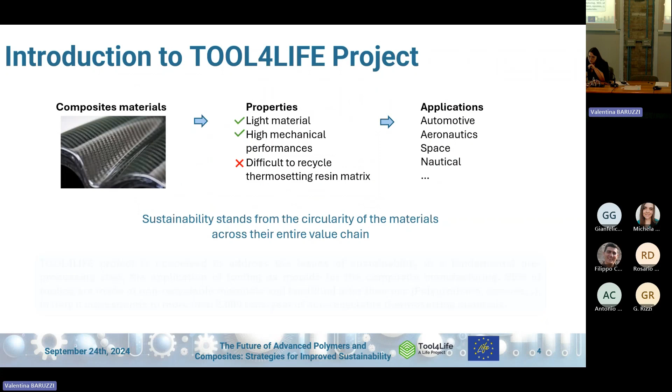But when we talk of these materials, we also have to consider the issues of sustainability. In particular, in our project, we consider the issue related to the thermosetting resins that are used during the production of the composite. Considering this issue, we can estimate that only in Italy, more than 2,000 tons per year of thermosetting material are landfilled. It comes from the production of composites tooling.

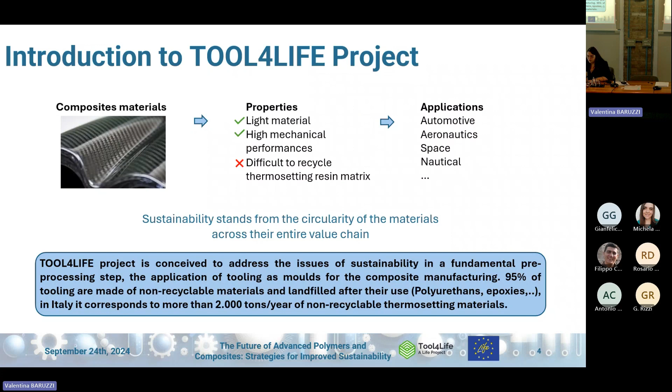The idea of the TOOL4LIFE project is to improve the sustainability of composites, addressing an important pre-processing step of this production, in particular the production of the master model. Usually, when we consider the production of a composite product, at least in this case, we have to consider a process of 3 steps. First, the master model is produced.

Usually in the benchmark situation, this is done using polyurethanes or thermosetting materials. Then this master model is used to produce a mold that is finally used to produce the final composite product. In TOOL4LIFE, we want to modify and optimize the methods, process, design, and materials for the production of this master model.

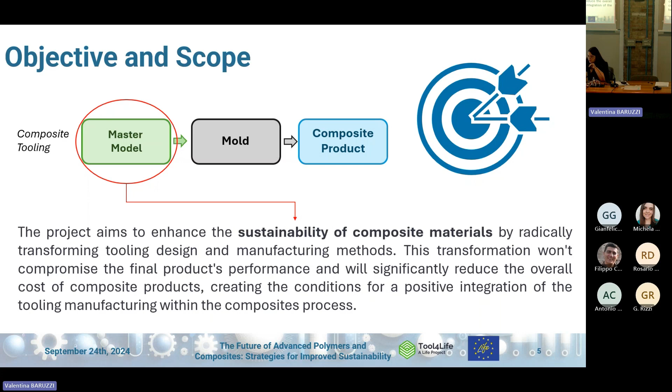The main objective is to develop and demonstrate a hybrid approach for this manufacturing, in particular using additive manufacturing and milling. This process will demonstrate a reduction of the total volume of material used of up to 80%. Furthermore, with the new process, we are able to achieve a cut of the energy consumption by 33% respect to the benchmark, and also a target of 9.2% reduction of the CO2 equivalent emission.

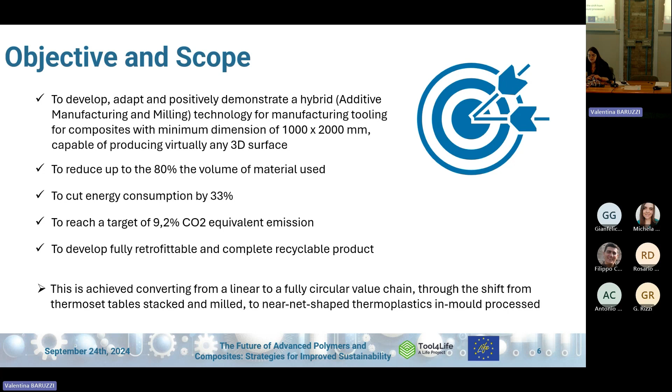Furthermore, we will also demonstrate a fully retrofittable and recyclable product for the master model. This will be done by converting from the typical production process, which considers a polyurethane table that is milled to the final product, to a fully circular value chain that also uses thermoplastic materials that are reusable.

This is our process. The first step in the production of the master model is additive manufacturing. This step already allows us to reduce a lot of the mass of material used in the production of the item, followed by a final milling to reach the final shape needed to then produce the final composite product.

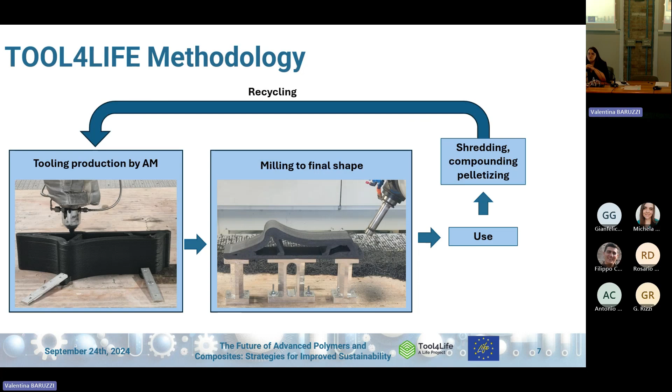After the use of this mold, the innovation of this process is that, using thermoplastic materials, it's possible to shred this product again. If needed, a new compounding is made with virgin material or other additives, and it can be used again to produce new pellets that are used again in the additive manufacturing process.

Our project in its execution is divided into 4 fundamental steps. We are now already at the end of this project, so the first step is completely done, and it's the design, the procurement, and the commissioning of the overall pilot.

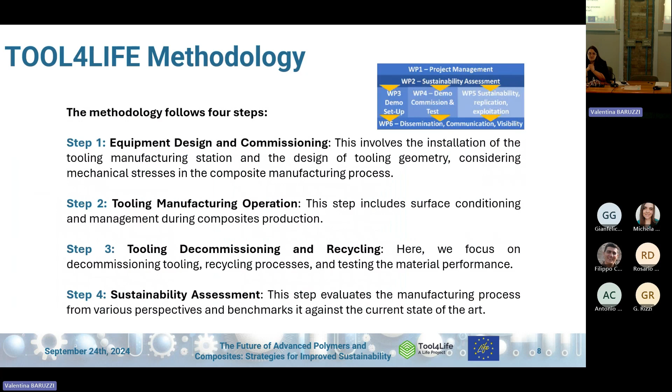Then the 3 subsequent steps are now ongoing: producing the different tooling to demonstrate our technology, the study of the recycling process in additive manufacturing, and also the sustainability assessment that allows us to demonstrate the positive impact of this project.

These slides want to show the role of the different partners. First of all, the first step of this project was to identify the best thermoplastic alternative material to be used in additive manufacturing. This work has been done by Centexbel.

Then the second step was the development of more sustainable water-based sealants, in particular primer and release agent, for the use of the tooling, and this has been done by Marbo.

Then there is also the study of the recycling process and how to optimize it. This is currently ongoing and is done by Centexbel with the support of Bercella for the pilot scale.

Rina has the role of the topological optimization of the master model in order to use as low a volume of mass as possible during additive manufacturing, and also we are performing the environmental, economic, and societal sustainability assessment of this new technology. Bercella takes care of all the demonstration and testing activities of the overall system, from production to recycling of the process.

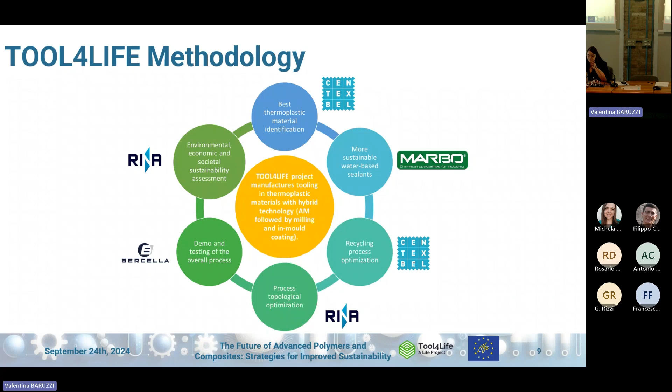You can see that the pilot is now working and operative, and we are now starting the validation phase. So finally, we will demonstrate that all the results of the project are effectively working well.

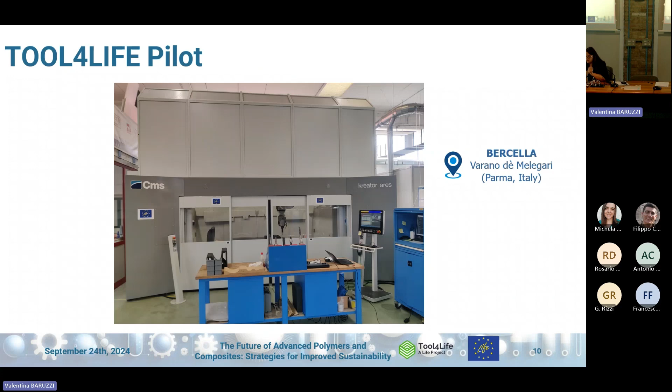This pilot is, of course, located in Bercella's facility. So here I wanted to give you an overall view of the impacts that we can have with this new technology.

First of all, a huge waste reduction. In fact, the new process, compared to the state-of-the-art process, can reduce up to 20% the volume of material that is landfilled at the end of the process. Furthermore, the use of additive manufacturing can reduce a lot the energy consumption that in the previous process was mainly related to the machining of the tooling.

Then with this process we can completely avoid the use of toxic chemicals such as isocyanates used in polyurethane production, and we also reduce a lot the CO2 equivalent emissions. If we consider a medium-sized tooling with the state-of-the-art production process, it releases around 685 kilograms of CO2 equivalent. With our new process, we arrive at 63 kilograms of CO2 equivalent per unit. So it's a huge difference.

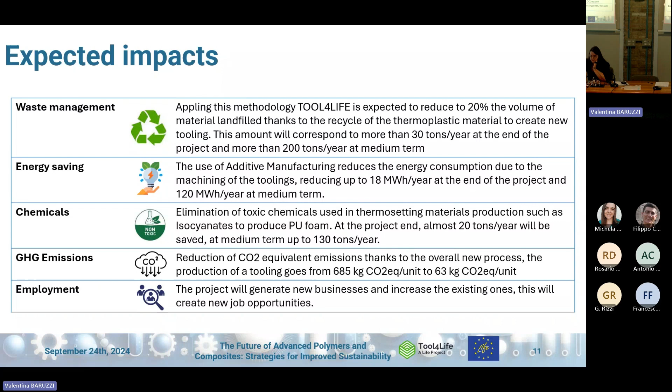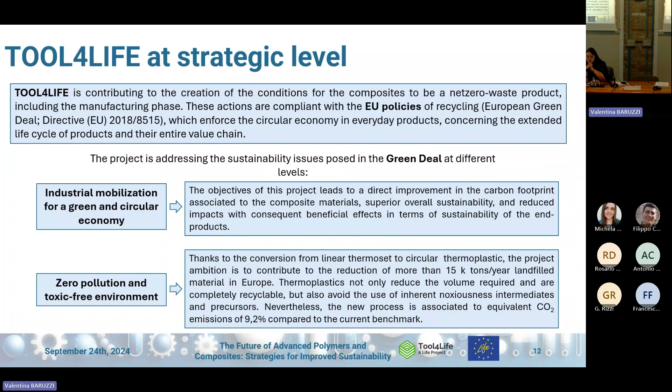If we want to see our project in a broader view, we can say that all these results are completely in line with the overall European policy and roads that all these projects are following. In particular, we are completely in line with the Green Deal and the objectives of circular economy and a zero pollution, toxic-free environment.

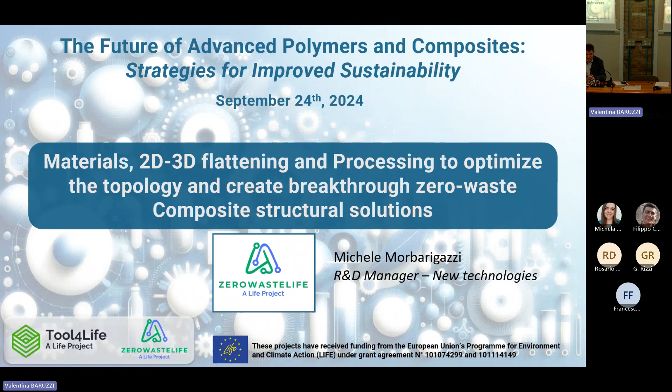I will proceed with the presentation of Zero Waste Life, a project that wants to investigate the possibility to improve sustainability from the other side of the circular economy. So avoiding the waste of materials, of raw materials - we start from the beginning and not from the end of the use of composites.

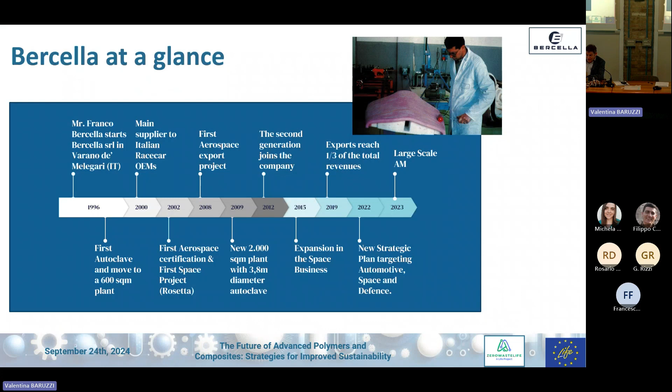A few words on Bercella: we started with Franco about 30 years ago. You can see some of our important steps - we are a quite important producer of motorsport carbon fiber parts. The new era of our activity is starting with an important role in aerospace. The last important innovation is the adoption of large-scale additive manufacturing, that Michela told you about before.

In a few words, we are a medium company of about 100 employees. Here you can see some numbers, and we have an important development plan because next year we will have a new plant mainly dedicated to aerospace and space production.

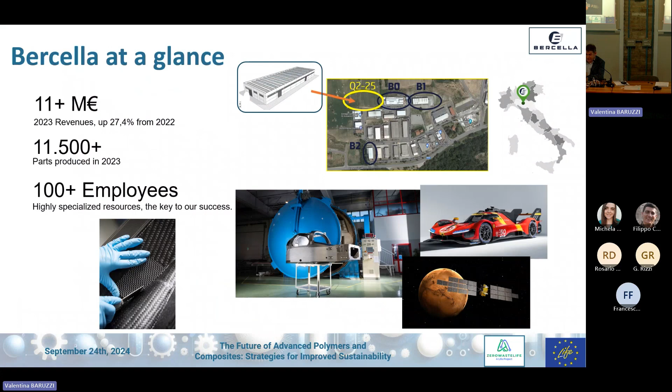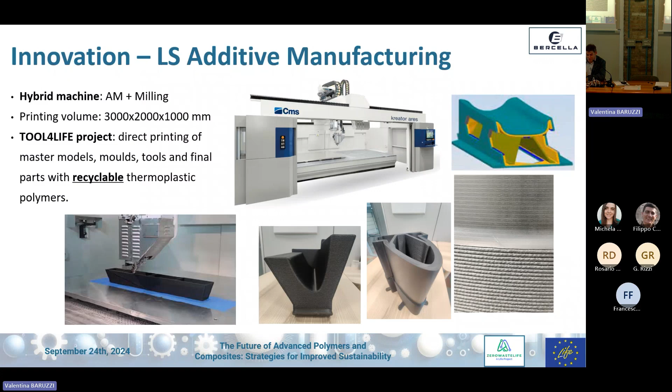You know almost all about large-scale additive manufacturing. We have an important machine with a printing volume of about 3 by 2 by 1 meters, and Michela described its function very well. We also have an example over there of printed polymer in raw and milled form, and we can discuss the technology afterward.

The Zero Waste Life project has three beneficiaries, three partners. Bercella is the coordinator, but also Nobrac in France, located in Montauban near Toulouse, in the very center of aerospace production in France. And an important role is played by RINA, located mainly in Genova.

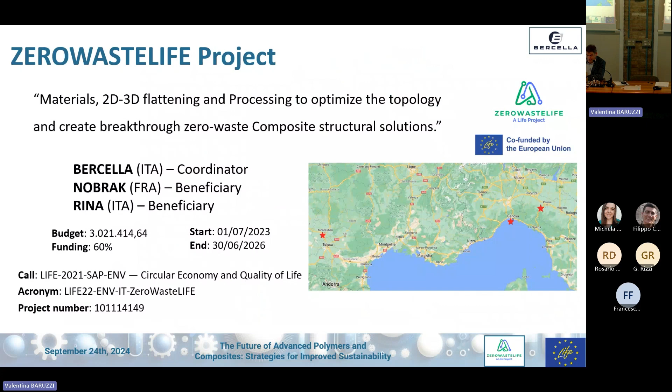The project is a 3-year project. We are at 15 months from the beginning, and it's a quite important project. You see the budget related to the project itself.

What are the main objectives of the project? The problem we started from is that the traditional technology of producing CFRP, carbon fiber reinforced polymers, is characterized by an important waste of raw material, mainly related to the cutting of the prepregs or the tow. The traditional way to get your shape is to cut from virgin carbon fiber fabric - we use prepreg, mixed with epoxy resin, and cure in autoclave. But even with heavy optimization of the cutting process, still a very important amount of material is wasted - we estimate a value between 30% to 50%, so on average 40% of material is wasted.

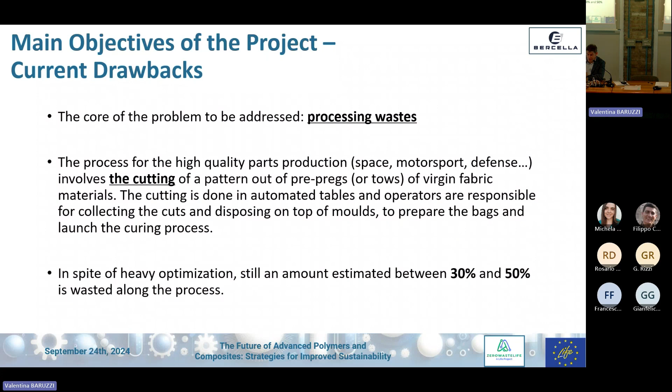Here are a couple of pictures explaining this concept, and it's pretty clear that realizing this kind of geometry is a nightmare with the traditional technology, because it's a real pity to waste this material, and it also has an economic impact on the company to waste all this kind of material.

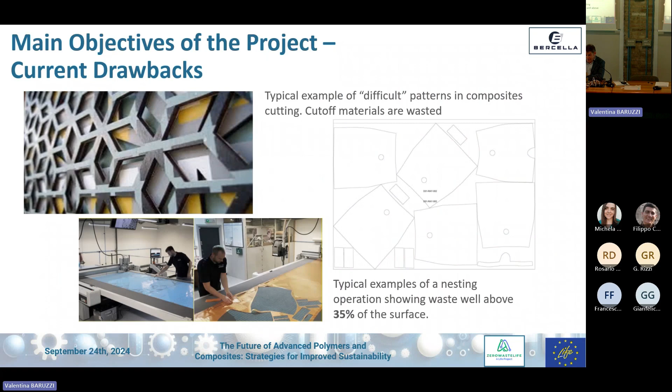The size of the problem is very important, because globally we have manufacturing of about 1 to 1.5 million tons per year, increasing 6 to 8% yearly. If we consider this is the production, we can calculate that the raw materials we started from are between 1.6 to 2.4 million tons. And so the volume we waste is in the range of 0.6 to roughly 1 million tons. So these are the numbers of waste all over the world.

And if we consider only the European area, such values are expected to stay in the range of 150 to 220 kilotons of volume waste.

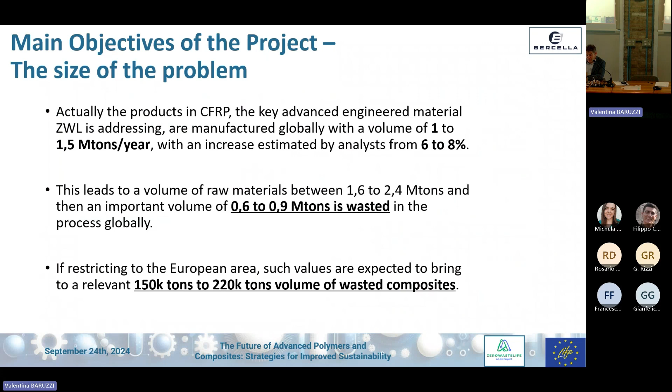What is the objective of the project? The key target is to demonstrate that the manufacturing of composite, three-dimensional shape composite with high mechanical performance, can be performed through an optimized amount of material, reducing the wasted volume near to zero. In a couple of minutes, I will describe how we can realize this objective.

The near-net shape design of the structure and the flattening process is realized by a new, fast and reliable process named high-volume tailored fiber placement. The main aspect of this technology is to place the carbon fiber exactly in the position we need, so in the direction of maximum stress.

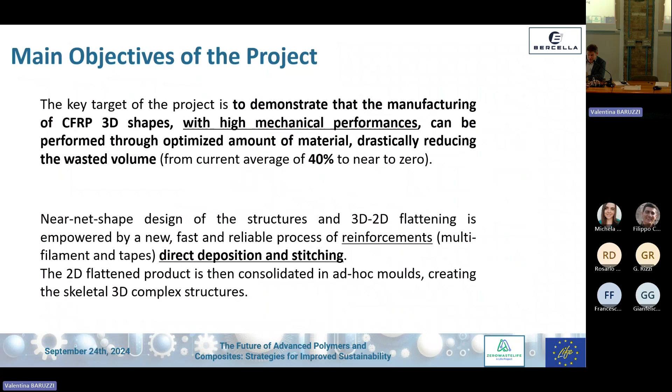The process is described here, and the sustainability is mainly related to avoiding the waste of materials at the origin, so we use almost 100% of the material. At the end, the process is not a process with high productivity, but it's a cheaper process than the traditional one. Another important aspect is that the final product we obtain needs only finishing activities.

The optimization process is supported by the use of a modular concept. I mean, the final shape will be reached leveraging the use of three basic elements, beam, plate, and shell, in order to realize the complete final shape.

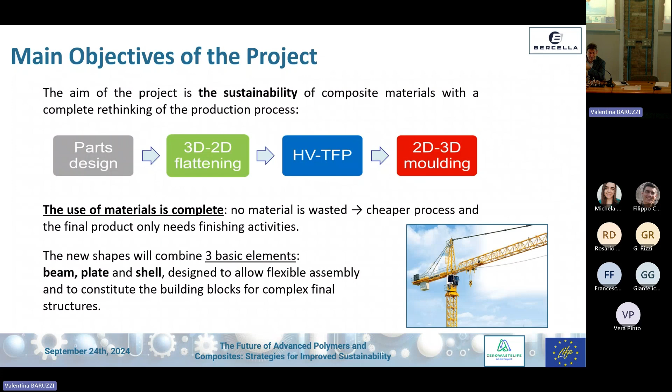Just to give an example of the idea behind this concept, is the tower crane. We can consider a tower crane realized only by beams. So this is the idea. Our solution is realized with HV TFP, so high-volume tailored fiber placement.

That is a sort of stitching machine, pretty complex, but you have the fiber, in our case the tow preg, so a single fiber or a small group of fibers placed on a surface, and they are immediately fixed, blocked in the right position by a very narrow stitching wire.

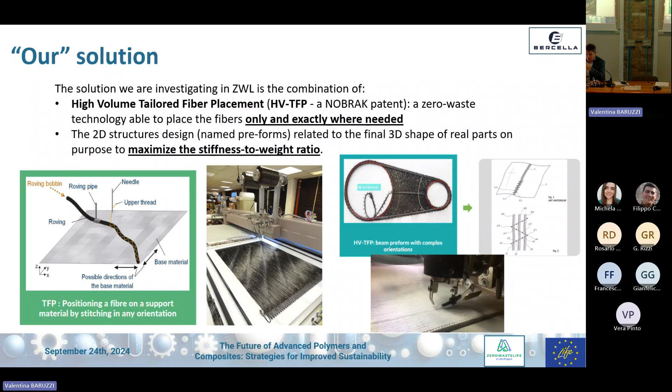This technology is very suitable in order to realize geometries with trabecular shape or honeycomb geometries and so on. So when we have geometries with voids, here we have the maximum of our performance and results. The process is divided into three main steps.

First step, starting from the three-dimensional CAD shape, is flattened with a 2D process. We start from a topological optimization of the three-dimensional shape in order to identify where we have to place the line along the maximum stress direction.

Then there is the manufacturing with the HVTFP machine, the realization of the preform. This is the name of the bidimensional parts we are considering, realized with the combination of beam, plate, and shell shapes.

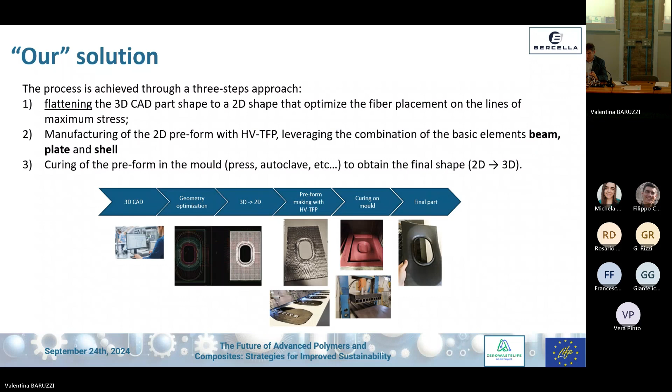And then we will investigate the possibility to cure this kind of preform, obviously positioned in a mold, in autoclave, but also with other curing technologies like press or resin infusion. So this is the technical aspect of the process.

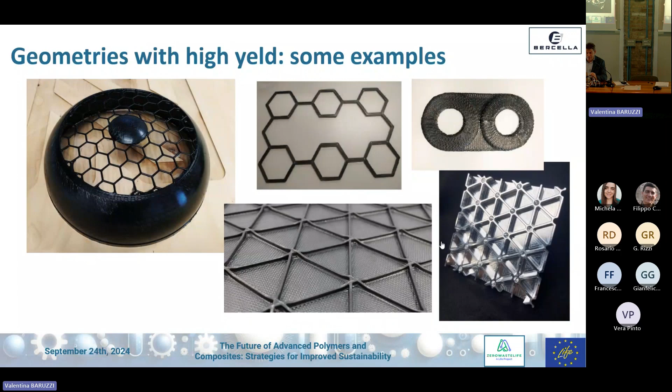Here we have some examples of geometries with high yield. It's pretty simple to understand why these geometries are good, because we have many voids and we have to identify the line along which we direct the stress of the parts.

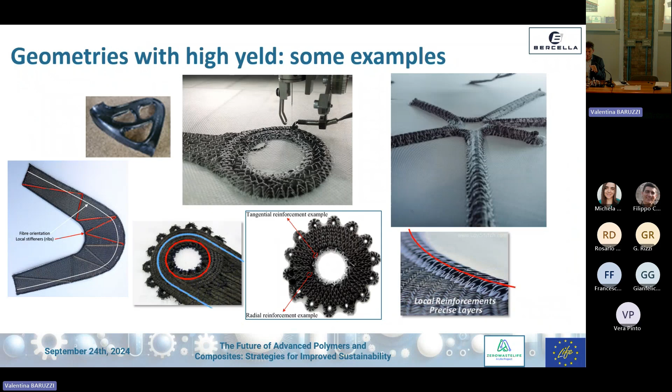And it's easy to understand that with traditional fabrics, where you have defined 0, 90 degree direction of the fibers, the position of the fiber along the stress direction is not optimized. With TFP, you can realize this kind of result pretty well.